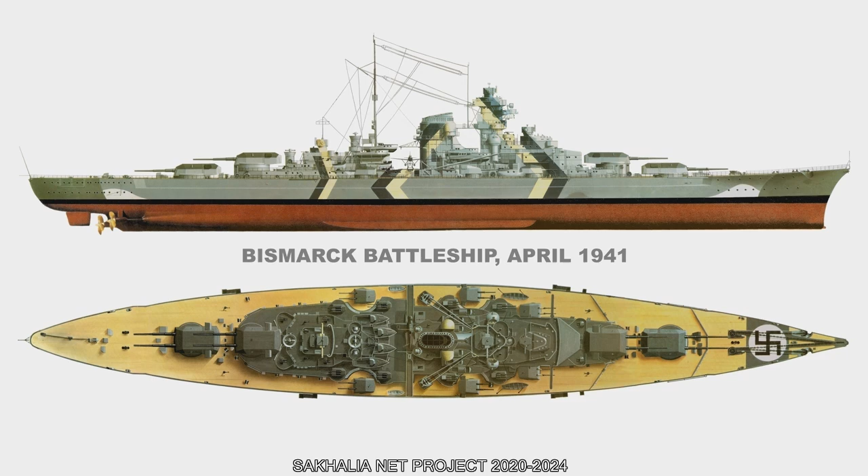The Bismarck, nucleus of the Third Reich's naval power during 1940 to 1941, is shown in the camouflage she wore in early 1941. Immediately before putting to sea for the breakout into the Atlantic along with the Prinz Eugen, she was painted with the common grey of German warships.

The black and white bands of the hull and superstructure, as well as the dark extremities and the white waves and wakes of the hull, constituted an attempt to reduce the apparent length of the ship. The swastika was intended for aircraft recognition, and it could be conveniently covered by canvas when it served no purpose.

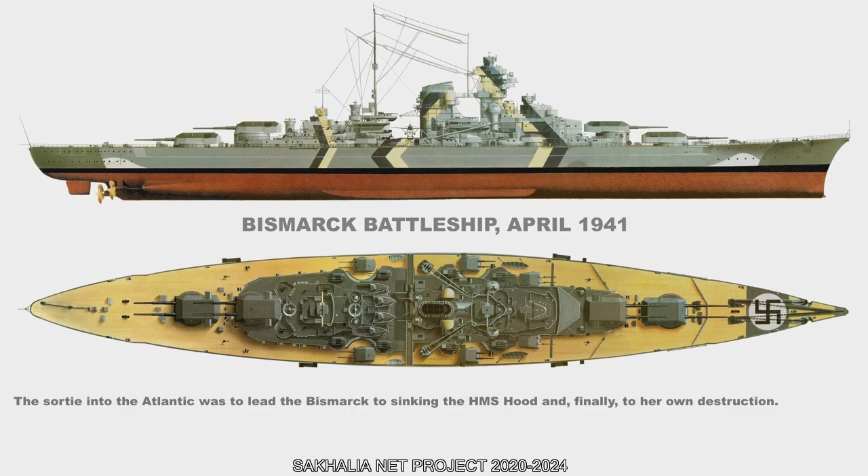The sortie into the Atlantic was to lead the Bismarck to sinking the HMS Hood and, finally, to her own destruction.

With a standard displacement of 41,700 tons, the Bismarck had a length of 251 meters, a beam of 36 meters, and a draft of 9.3 meters.

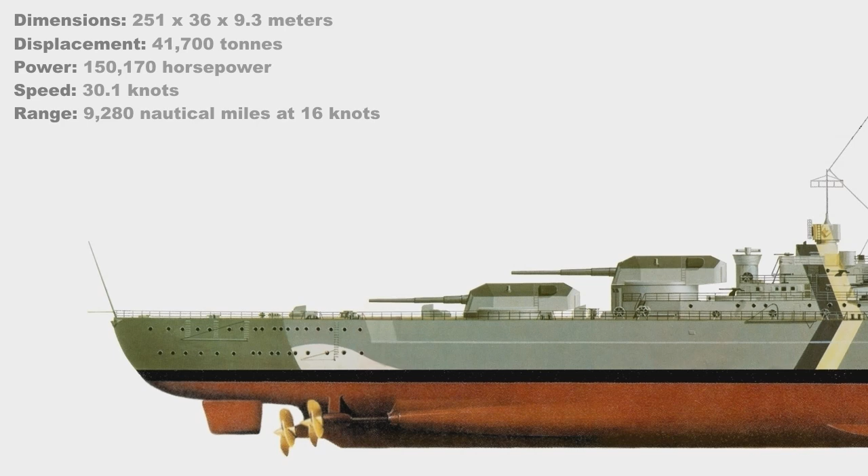With an engine power of 150,170 horsepower, the Bismarck could achieve a maximum speed of 30.1 knots, and with her load of 7,461 tons of petrol she could travel 9,280 nautical miles at a speed of 16 knots.

The armament of the Bismarck comprised 8 380mm cannons installed in 4 twin turrets, 12 150mm cannons installed in 6 twin turrets, 16 105mm cannons installed in 8 twin mountings, 16 37mm cannons installed in 8 twin mountings, and 12 20mm cannons installed in 12 single mountings.

The reconnaissance aircraft were 4, or exceptionally 6, Arado AR-196.

The armor layers of the Bismarck had a thickness of 145 to 323 mm in the belt, 45 mm in the torpedo bulwark, 50 mm in the upper deck, 30 mm in the main deck, 80 to 120 mm in the armored deck, 220 to 340 mm in the barbettes, 130 to 360 mm in the main turrets, 20 to 100 mm in the secondary turrets, and 220 to 360 mm in the conning tower.

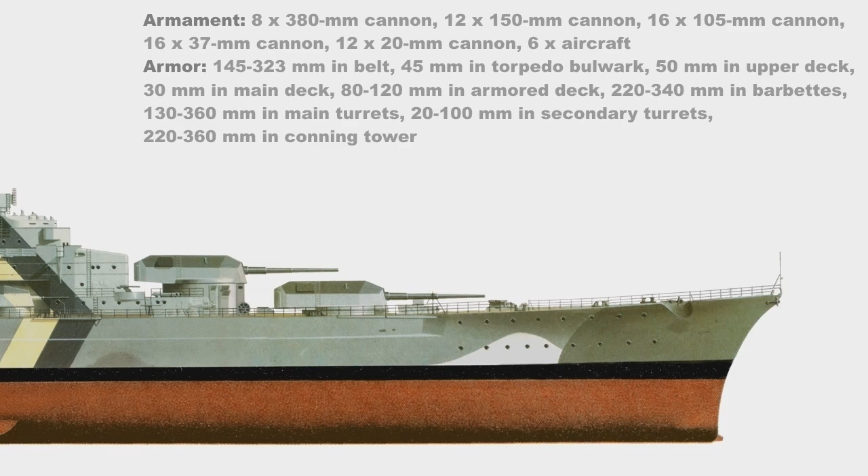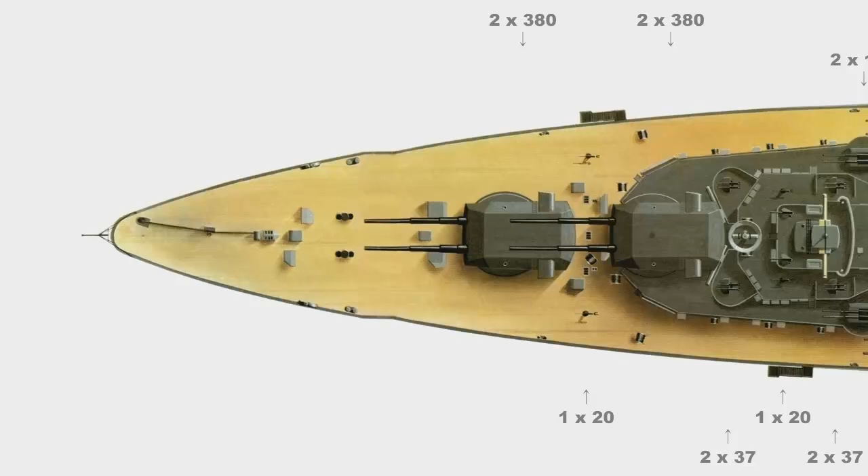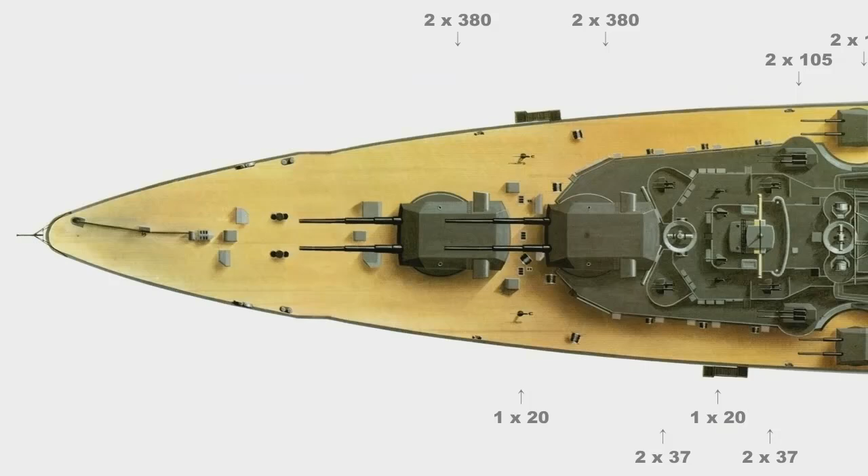The armament on the Bismarck was distributed like this: 4 380mm twin mountings, 2 forward and 2 abaft; 6 150mm twin mountings, all amidships; 8 105mm twin mountings, all amidships; 8 37mm twin mountings, 4 in the fore section of the superstructure and 4 in the aft section; and 12 20mm single mountings, scattered from the fore end of the superstructure to the aft end.

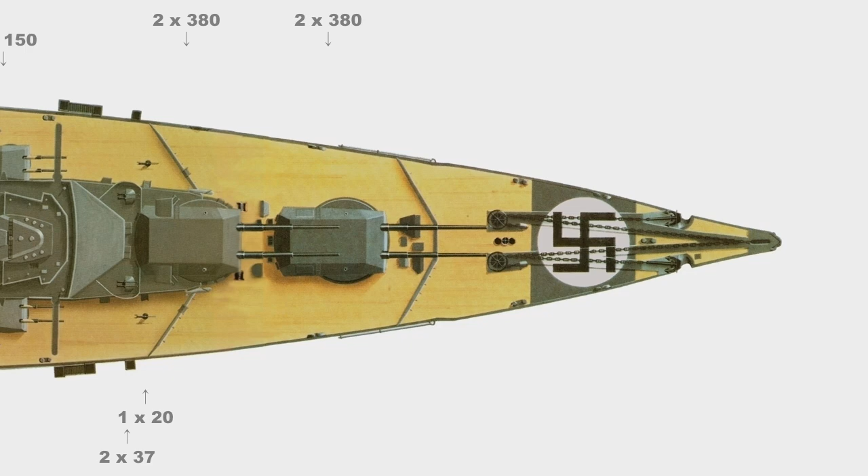The 3 propellers had 4.7 meters in diameter and 3 blades. The port and middle propellers rotated counterclockwise, whereas the starboard propeller rotated clockwise, reaching 270 revolutions per minute at full speed.

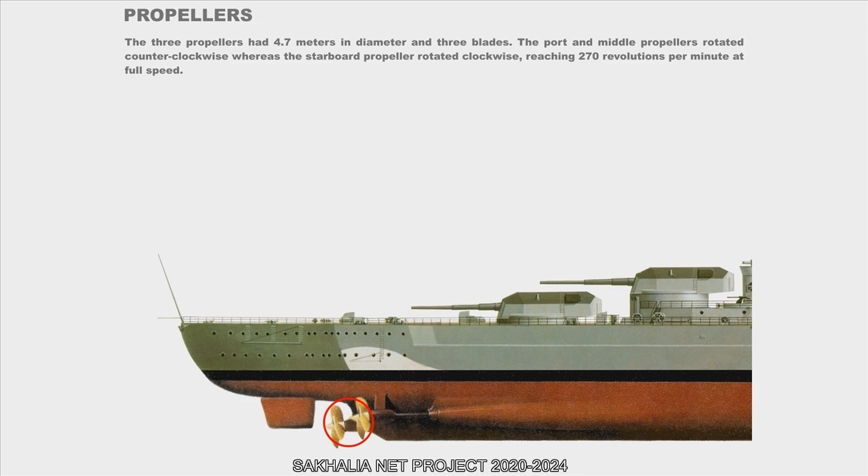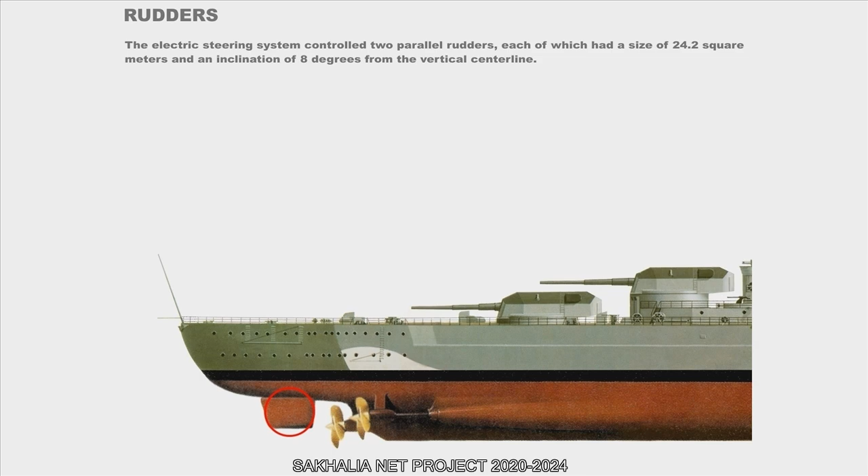The electric steering system controlled two parallel rudders, each of which had a size of 24.2 square meters and an inclination of 8 degrees from the vertical centerline.

Four Arado AR-196 reconnaissance seaplanes, whose wings could be folded to save space, were carried on board the Bismarck. Two aircraft were stored in a double hangar located beneath the main mast and another two in single hangars located at both sides of the funnel. Optionally, another two aircraft could be carried, but they would have to stay on the catapult at all times.

The armor in the belt was made of Krupp cementite face-hardened steel plates of up to 320 mm in thickness. The belt was backed by a layer of teakwood of 60 mm in thickness, which helped to absorb shock damage, and bolted onto a side plating of 16 to 25 mm in thickness.

The armor above the main belt was made of Krupp cementite face-hardened steel plates of 145 mm in thickness.

The armor in the secondary cannon turrets was made of Wotan Hart homogeneous steel plates, which in the barbettes had a thickness of 80 mm above the deck and 20 mm beneath it, while in the turrets had a thickness of 100 mm in the front, 40 mm in the rear and the sides, 35 mm in the front roof angle and 20 mm in the rear roof angle.

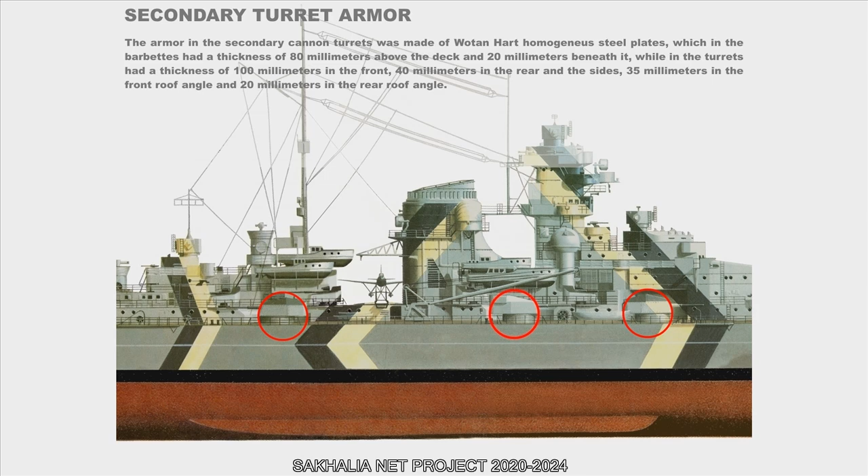The armor in the conning tower was made of Krupp cementite face-hardened steel plates, which had a thickness of 350 mm in the walls and 220 mm in the roof.

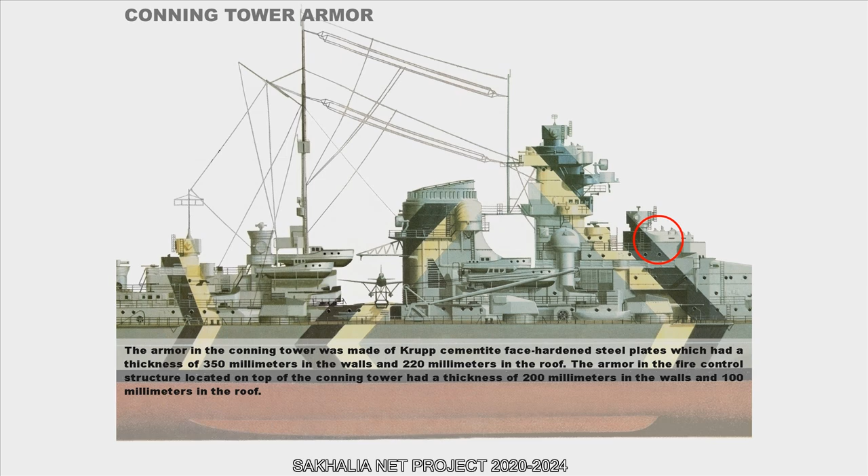The armor in the fire control structure located on top of the conning tower had a thickness of 200 mm in the walls and 100 mm in the roof.

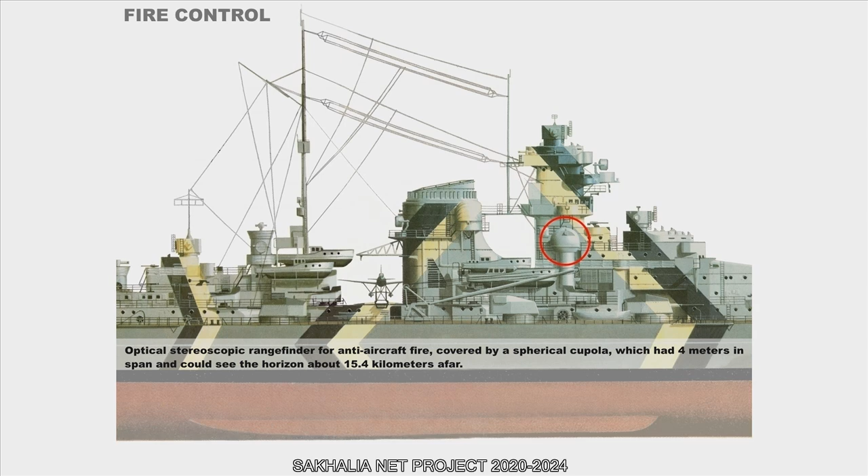An optical stereoscopic rangefinder for anti-aircraft fire, covered by a spherical cupola, had 4 meters in span and could see the horizon about 15.4 kilometers afar.

7 searchlights of 1.5 meters in diameter made by Siemens Schuckertwerk AG were installed in the superstructures of the Bismarck. 2 of them, placed at each side of the funnel, were fitted with dome-shaped covers.

The armor in the main cannon turrets was made of Krupp cementite face-hardened steel plates, which in the barbettes had a thickness of 340 mm while in the turrets had a thickness of 360 mm in the front, 320 mm in the rear, 220 mm in the sides, 150 mm in the side roof angles, 180 mm in the front and rear roof angles, and 130 mm in the horizontal roof.

Each of the main cannon turrets weighed 1052 tons.

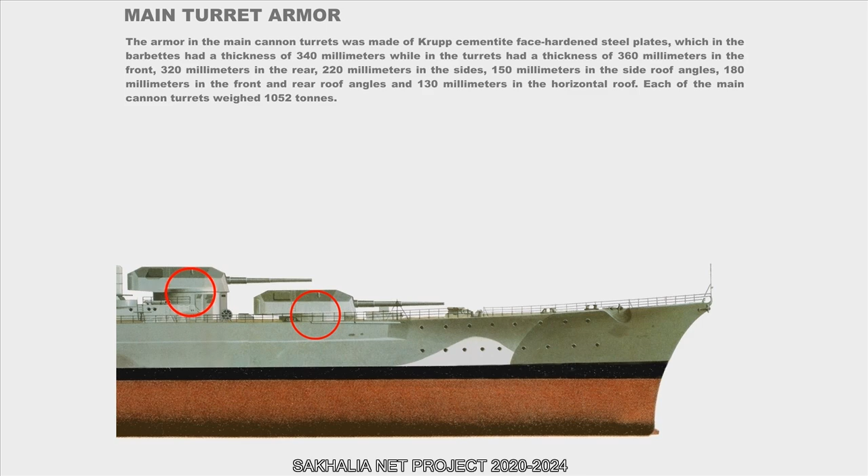A set of hydrophones allowed the Bismarck to detect the noise emitted by the propellers of submarines, torpedoes, and surface ships on a range beyond that which could be seen in conditions of low visibility.

The 380mm SKC-34 naval cannon weighed 111 tons and had a total length of 19.6 meters, 52 calibers. It had a muzzle velocity of 820 meters per second and an effective range of 35.5 kilometers, being able to fire 3 800-kilogram shells per minute.

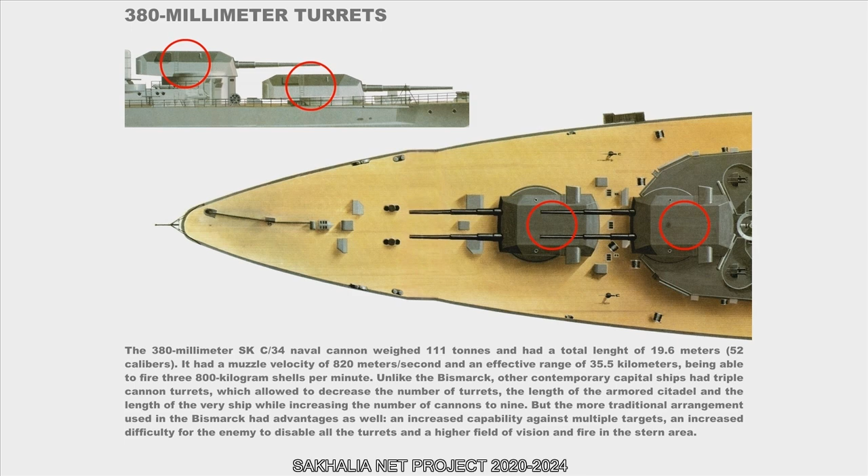Unlike the Bismarck, other contemporary capital ships had triple cannon turrets, which allowed decreasing the number of turrets, the length of the armored citadel and the length of the ship, while increasing the number of cannons to 9. But the more traditional arrangement used in the Bismarck had advantages as well: increased capability against multiple targets, increased difficulty for the enemy to disable all the turrets, and a higher field of vision and fire in the stern area.

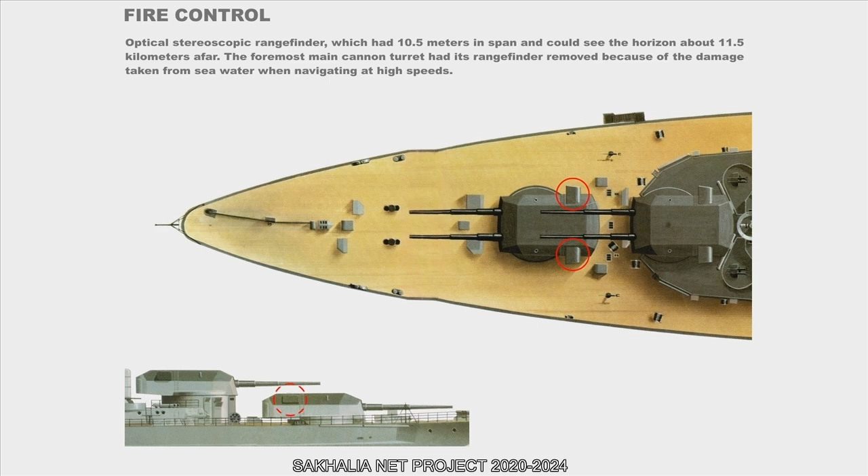Optical stereoscopic rangefinder, which had 10.5 meters in span and could see the horizon about 11.5 kilometers afar. The foremost main cannon turret had its rangefinder removed because of the damage taken from sea water when navigating at high speeds.

Optical stereoscopic rangefinder for anti-aircraft fire, which had 4 meters in span and could see the horizon about 14 kilometers afar.

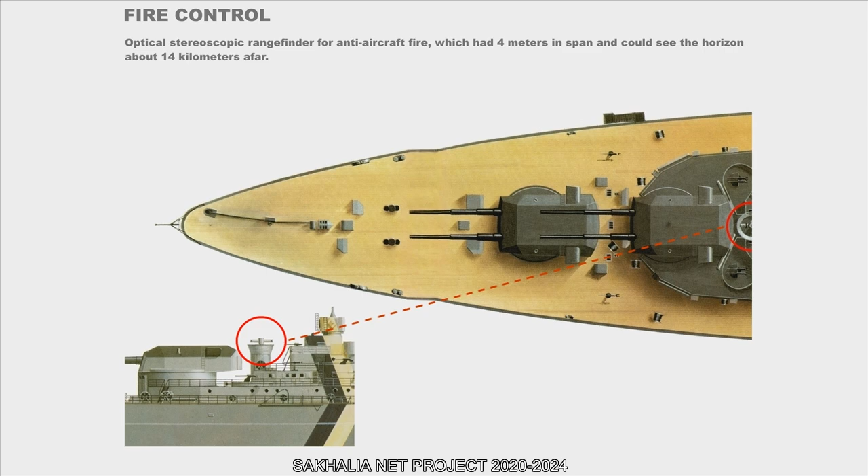No less than 17 hose reels of different sizes were distributed along the main weather deck and the superstructure to assist washing or fire extinction throughout the whole ship.

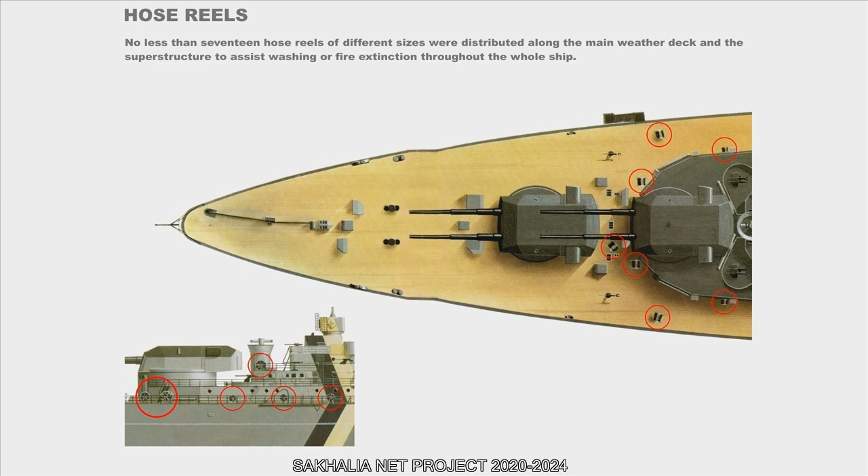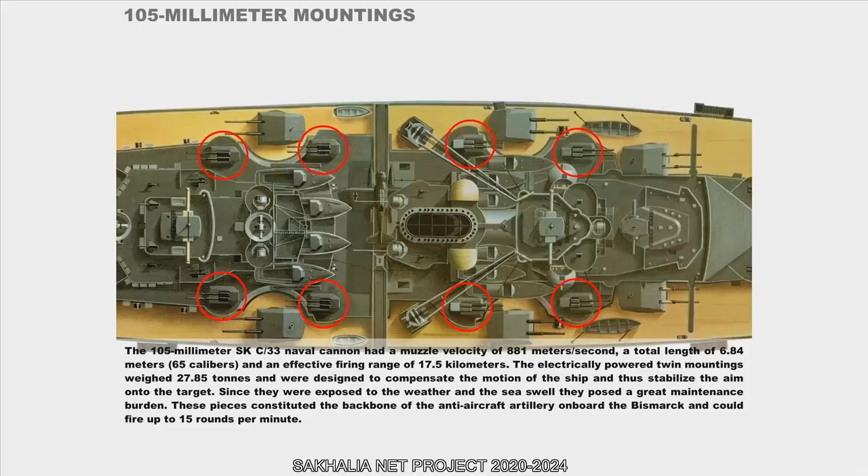The 105mm SK C/33 naval cannon had a muzzle velocity of 881 meters per second, a total length of 6.84 meters, 65 calibers, and an effective firing range of 17.5 kilometers. The electrically powered twin mountings weighed 27.85 tons and were designed to compensate the motion of the ship and thus stabilize the aim onto the target. Since they were exposed to the weather and the sea swell, they posed a great maintenance burden. These pieces constituted the backbone of the anti-aircraft artillery on board the Bismarck and could fire up to 15 rounds per minute.

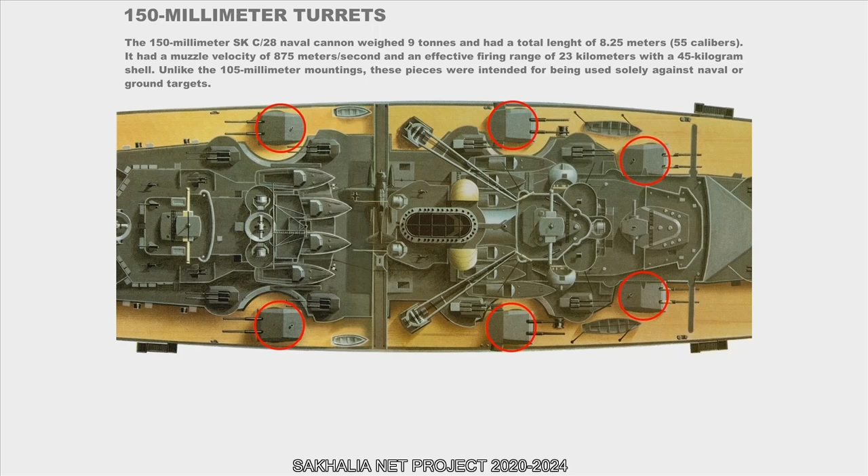The 150mm SK C/28 naval cannon weighed 9 tons and had a total length of 8.25 meters, 55 calibers. It had a muzzle velocity of 875 meters per second and an effective firing range of 23 kilometers with a 45 kilogram shell. Unlike the 105mm mountings, these pieces were intended for being used solely against naval or ground targets.

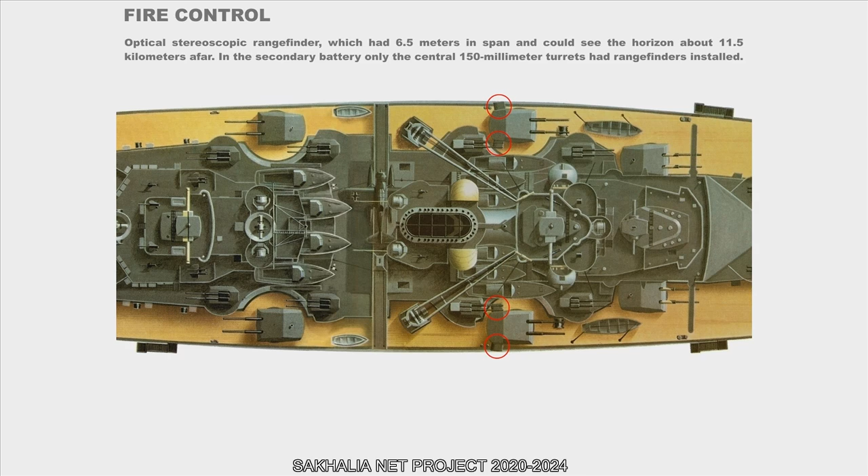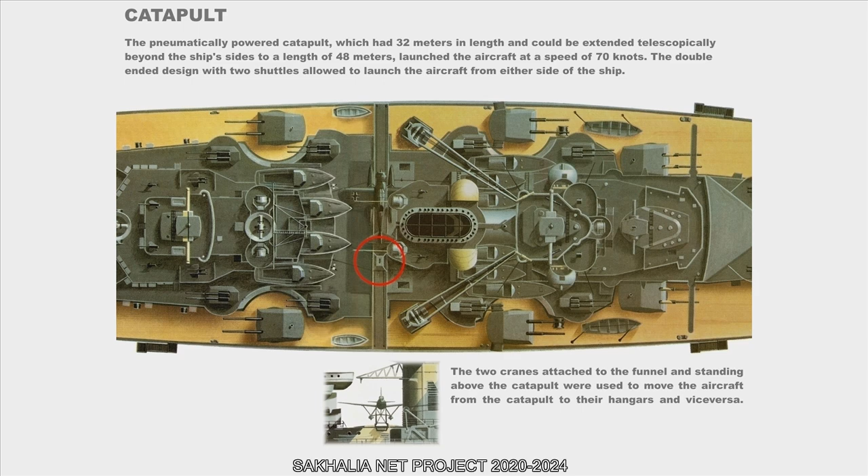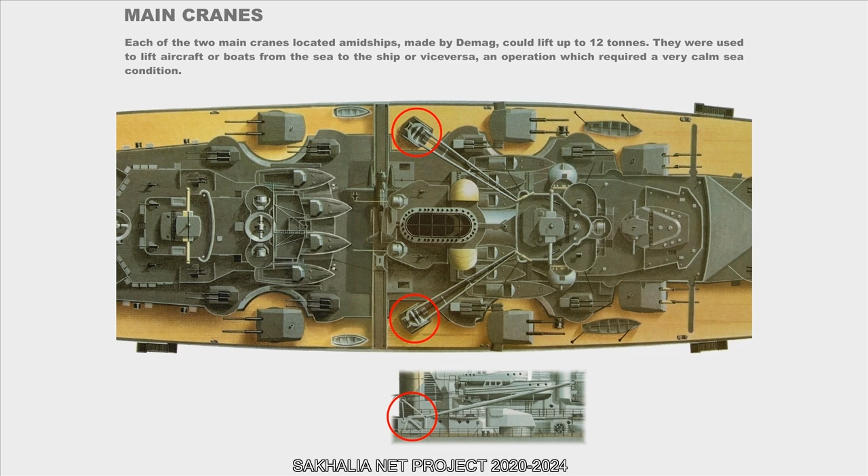Each of the 2 main cranes located amidships, made by Demag, could lift up to 12 tons. They were used to lift aircraft or boats from the sea to the ship or vice versa, an operation which required very calm sea conditions.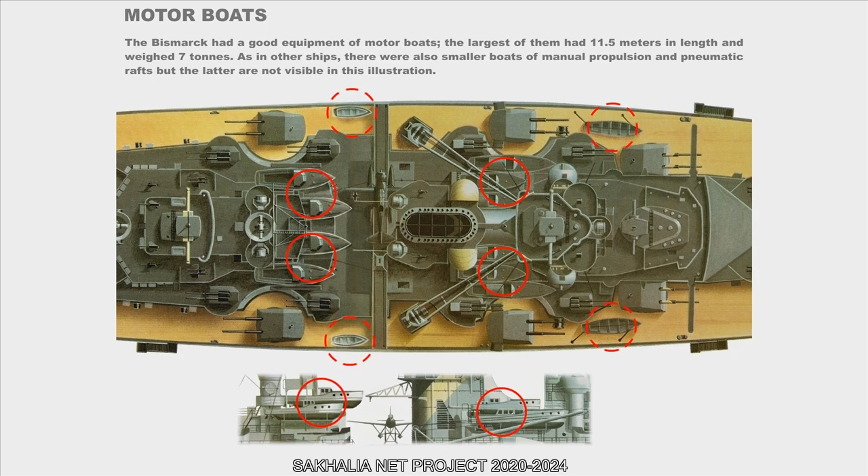The Bismarck had a good equipment of motorboats. The largest of them had 11.5 meters in length and weighed 7 tons. As in other ships, there were also smaller boats of manual propulsion and pneumatic rafts, but the latter are not visible in this illustration.

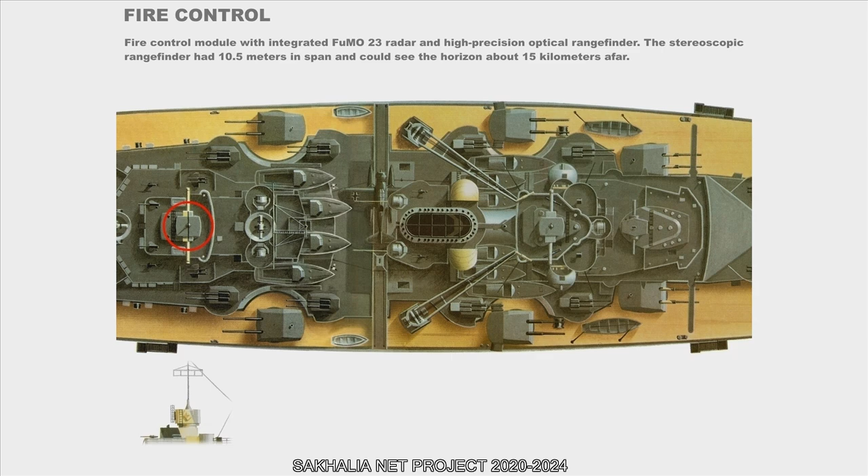Fire control module with integrated FuMO 23 radar and high-precision optical rangefinder. The stereoscopic rangefinder had 10.5 meters in span and could see the horizon about 15 kilometers afar.

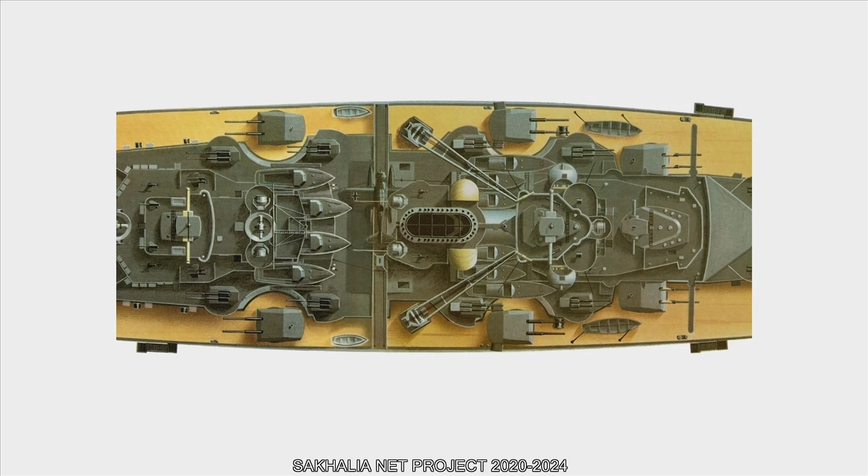Optical stereoscopic rangefinder for anti-aircraft fire, which had 4 meters in span and could see the horizon about 15.8 kilometers afar.

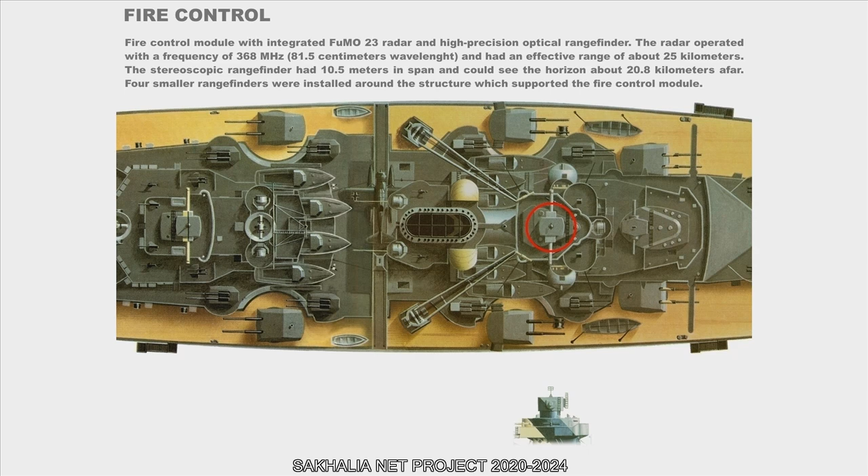Fire control module with integrated FuMO 23 radar and high-precision optical rangefinder. The radar operated with a frequency of 368 MHz, 81.5 centimeters wavelength, and had an effective range of about 25 kilometers. The stereoscopic rangefinder had 10.5 meters in span and could see the horizon about 20.8 kilometers afar. 4 smaller rangefinders were installed around the structure, which supported the fire control module.

Fire control module with integrated FuMO 23 radar and high-precision optical rangefinder. The stereoscopic rangefinder had 7 meters in span and could see the horizon about 16 kilometers afar.

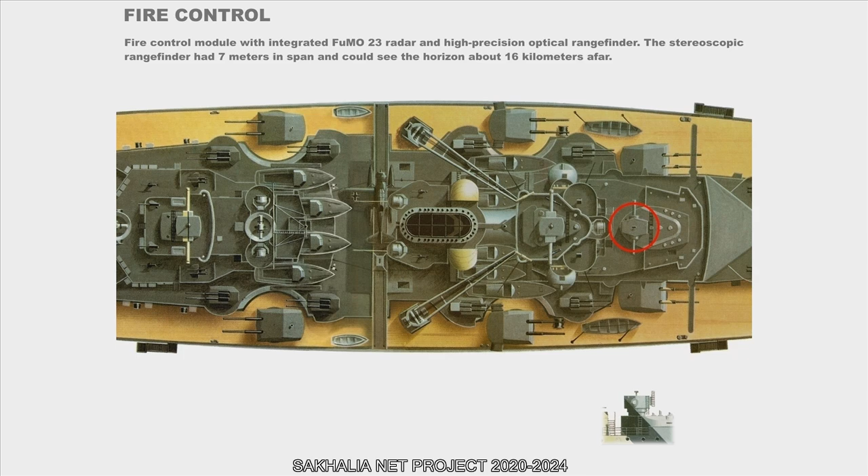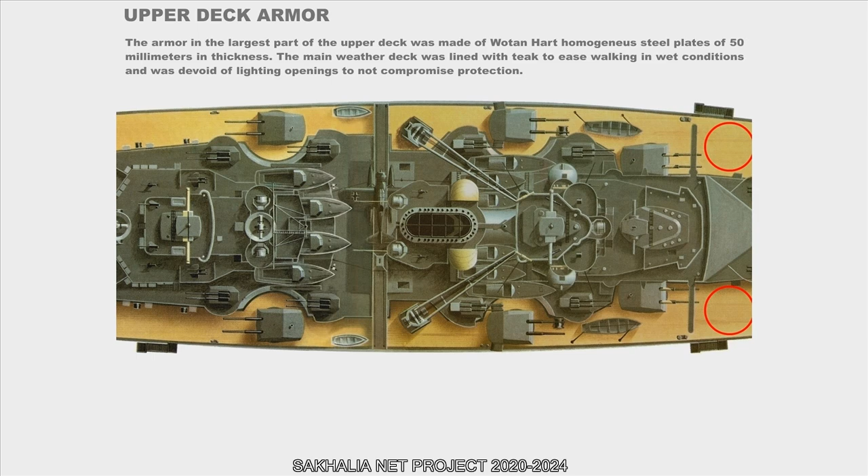The armor in the largest part of the upper deck was made of Wotan Hart homogeneous steel plates of 50 mm in thickness. The main weather deck was lined with teak to ease walking in wet conditions and was devoid of lighting openings to not compromise protection.

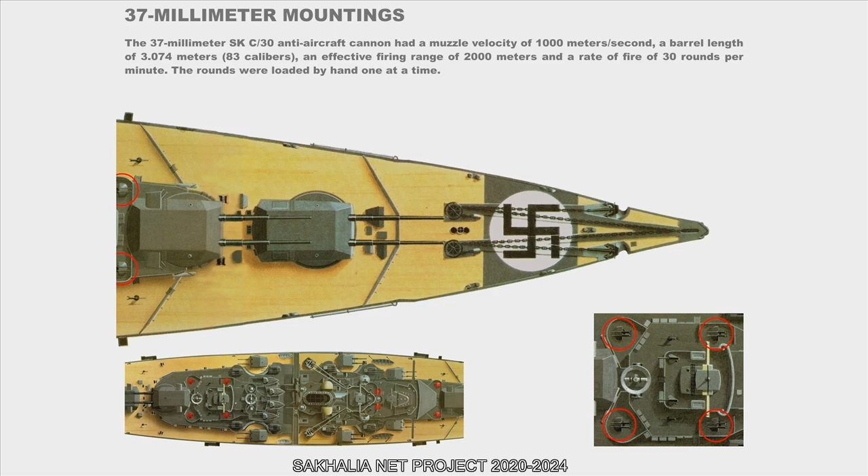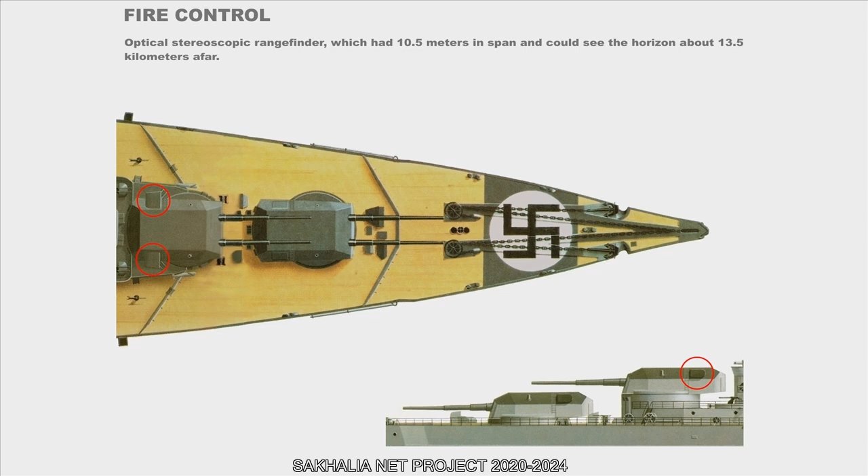Optical stereoscopic rangefinder, which had 10.5 meters in span and could see the horizon about 13.5 kilometers afar.

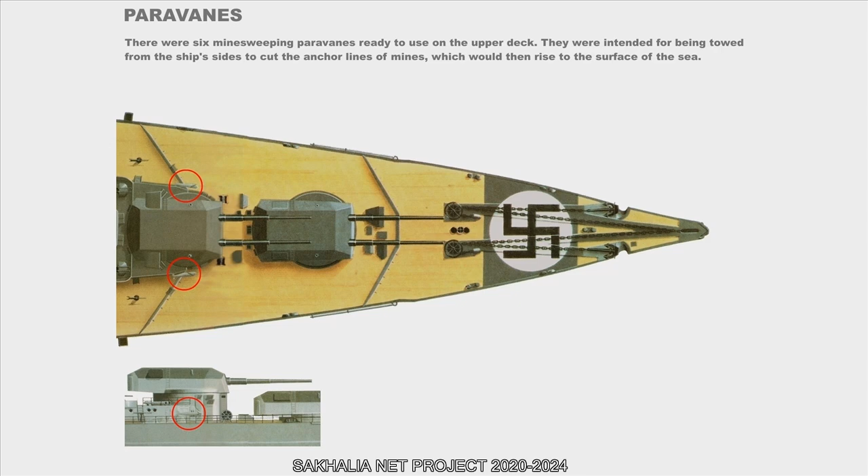There were 6 minesweeping paravanes ready to use on the upper deck. They were intended for being towed from the ship's sides to cut the anchor lines of mines, which would then rise to the surface of the sea.

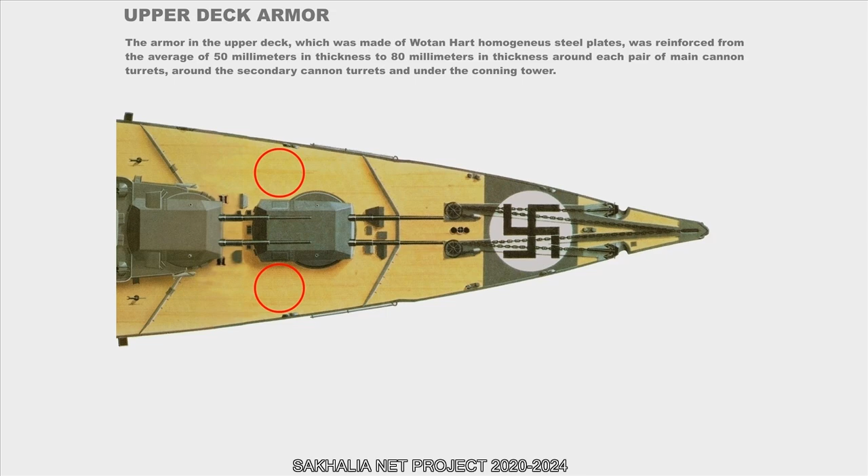The armor in the upper deck, which was made of Wotan Hart homogeneous steel plates, was reinforced from the average of 50 mm in thickness to 80 mm in thickness around each pair of main cannon turrets, around the secondary cannon turrets and under the conning tower.

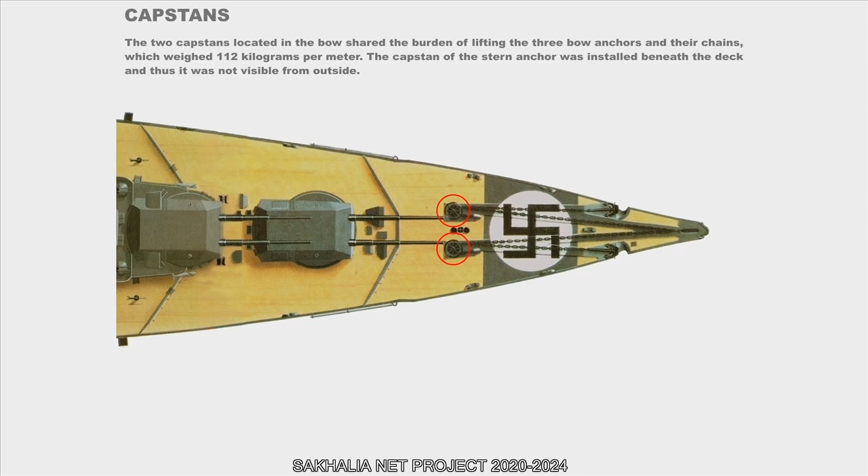The 2 capstans located in the bow shared the burden of lifting the 3 bow anchors and their chains, which weighed 112 kilograms per meter. The capstan of the stern anchor was installed beneath the deck and thus it was not visible from outside.

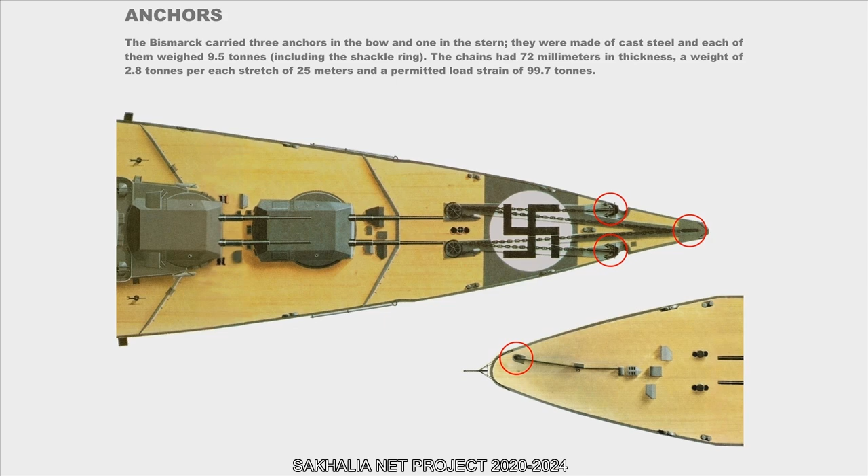The Bismarck carried 3 anchors in the bow and 1 in the stern. They were made of cast steel and each of them weighed 9.5 tons, including the shackle ring. The chains had 72 mm in thickness, a weight of 2.8 tons per each stretch of 25 meters, and a permitted load strain of 99.7 tons.